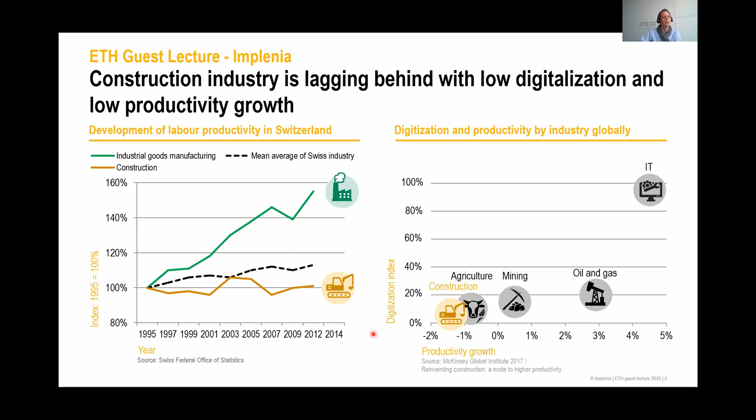So there is definitely a need to change within the construction industry. And I would say if a company like Implenia or other companies do not really use this change that will come, we will have severe issues in the future. So that's a bit why we really have to look at all the newest developments within the construction industry. This is really important for the future of each and every company within the construction industry.

If you Google a bit, you would also see Implenia is building quite intensively abroad. And that's also our mission. So what is the mission of the company Implenia? We want to be the leading multinational integrated construction and real estate company. You see in the claim it's not only integrated construction, but also real estate. So real estate will have a high priority in the future of Implenia, not only buildings.

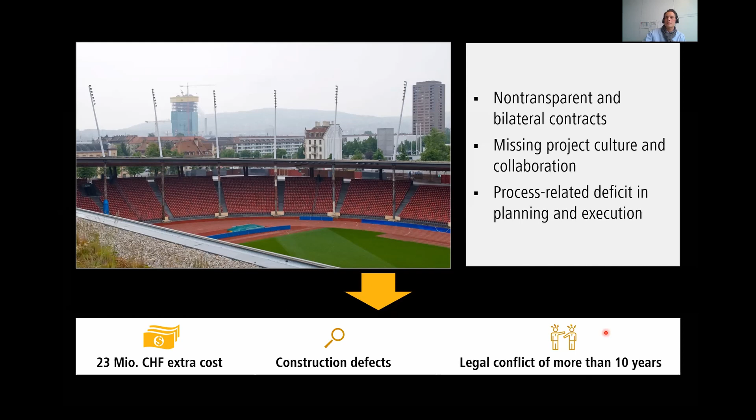So there's a clear sign that cannot be the future. We have to change something.

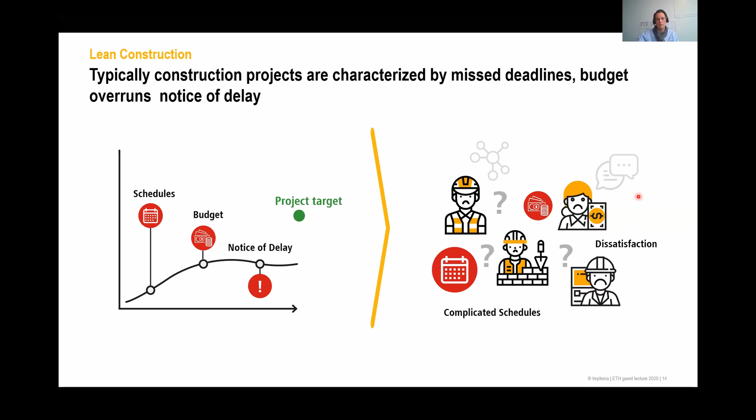Complicated schedules make it difficult to keep track of important to-dos and deadlines. The flood of information within the project often creates confusing communication pathways. This creates a lot of dissatisfaction among all project participants, but unfortunately always also within the client. So at the end, nobody is happy with the situation and nobody wins.

Now, what does lean construction help here? Lean construction puts a central focus on the communication process and on the construction process, which means at the end, what we really try to do is accelerate the construction pace. We try to reduce cost, always with the focus on delivering the right quality that the end customer or client is requesting from us as a company.

The Implenia approach is based on our Implenia values. Like a lot of companies, Implenia has defined their values, which are agility, excellence, integrity, sustainability, and collaboration. We try to embark on the path to efficient and effective projects using lean principles, lean methods, and lean tools. Now again, a bit of the background.

What are our principles? Principles guide our actions, so they are the guidance for us how we should act in terms of lean. Methods are required for the implementation of our principles and must be tailored to a specific project. It's really important that we do not want to use every method on every construction project, but really decide which kind of methods can help a project to be more efficient and effective. We must really define what kind of methods we use for each and every project. Then at the end, the tools just simplify the support of the application of the methods on a construction project within Implenia.

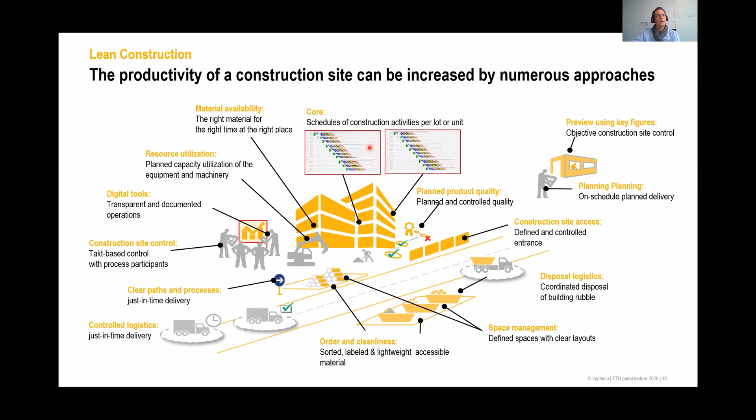The core of the whole topic is always how you tell your subcontractors when they have to do what kind of work in which area. There are a lot of methodologies that help - one is takt planning, the other is last planner system. There are a lot of good tools from the lean area to really improve your core process on a construction site. So there are plenty of possibilities to really improve.

Now, how Implenia has rolled out their lean construction approach. We have defined 5 elements: enablement and awareness of people, methods and tools, standards and lighthouse projects, maturity, and lean organization and network.

In the following slides, I'd like to go into each of the elements and show you an example of how we tried to really implement lean within our group, our company. So for the first topic, enablement, we have clearly created a training concept.

We have 2 main training levels for all our employees - basic level, that's the first level, and the second level is advanced. For each of the levels we also have defined different target groups. We have the external target group, subcontractors and partners - they also get a certain basic training. We have the project team, where we certainly have basic training as well as advanced training.

Always important in the whole lean transformation, it's not only that you have to train your people on the project, but also the management - that's really an important part. That's why we also have training defined for the management role, basic as well as advanced.

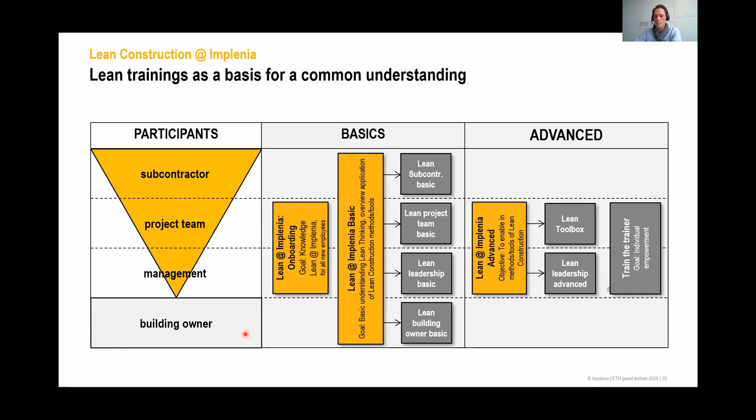And building owner, which means also customer, they need to understand why we implement lean, why we work with lean. At the end they have to understand the topics so they can support, because most of the time it's also important for a construction project that we get feedback, input, and decisions from the owner or our clients, also on an agile base. That's why they need to understand what is behind lean - that's a really important part of the whole story. Do trainings for a common understanding within your company.

Then the second part of the whole lean transformation is standardization of the lean way of working. Therefore, Implenia has set up a lean toolbox. So what is a lean toolbox for us? A lean toolbox at the end gives guidance to the people about standards and examples of how they implement lean or lean methods on the projects.

It always gives some illustrative examples and best practices for the people. So basically at the end, you can see in the toolbox which process step you are at with your project, and you find appropriate tools. All the tools are described within the toolbox with four different areas. Each tool is always described with the target of the tool, a clear description of the method - what you have to do - some linked standards you can use when you try to implement that tool, and you always have some examples.

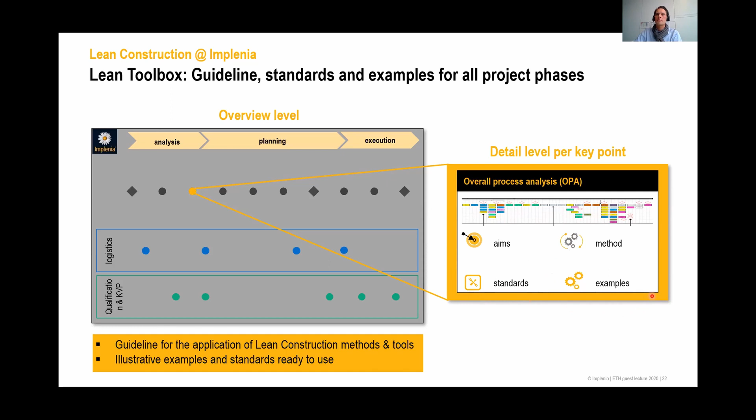How we bring the toolbox to the people - at the end it's a simple SharePoint where all the people within the Implenia group have access and find the relevant information.

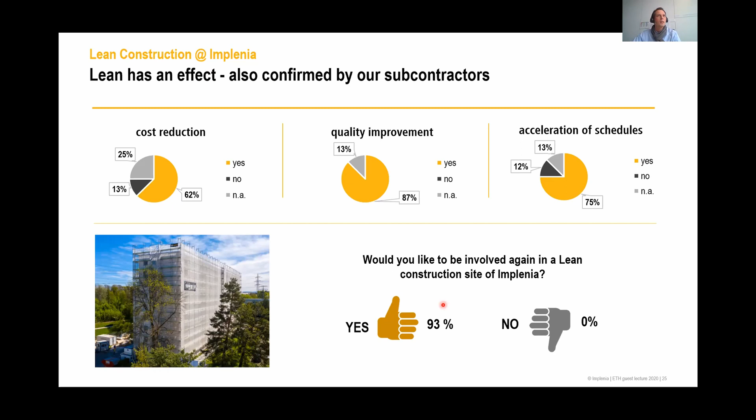So at the end, everybody was happy. And for me, the most important question was, would you like to be involved again in a lean construction site of Implenia? And almost everybody said yes, I like to work for the next project for Implenia again with lean. I think that's really crucial and important for a multiplication of the whole lean topic within the whole Implenia group.

Then the second last part is maturity. In order to continuously improve yourself, you always have to measure and see where you are and where you should go. Therefore, we have two parts within the maturity element. One is we conduct for each and every lean project a so-called project lean maturity assessment, where we assess the project three times: always at the beginning, in the middle, and at the end of the project. We try to see, do we have a maturity level increase within the execution of the project?

Why we do that: on one hand, we try to find some good practices, best practices, that we can share with other projects. On the other hand, to really see if people are developing their lean thinking and lean methodologies within the execution of a project. On the other hand, it's also important to have a look at the whole organization.

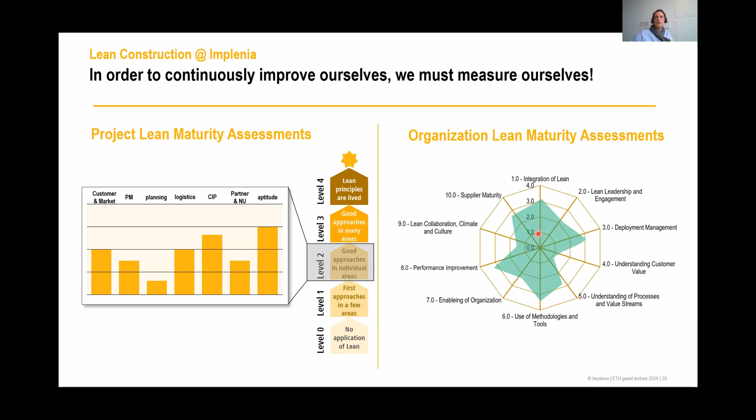So let's say some country organizations, as an example it could be Building Switzerland, where at least twice a year we do an organizational lean maturity assessment, where we see, in 10 different areas, how we rate ourselves. For example, where we have room for improvement, and where we are already in good shape. It's also important to execute the organizational lean assessment not just once, that's not the whole story. You really need to see how you develop over time, and of course you need to increase your maturity in a certain area over time. That's why for us it's really important to measure.

Then the last part is the lean matrix organization, how lean is embedded in the whole local business. First of all, it's important to know that within Implenia we have a support function, global project excellence and services, and within that support function lean is also sitting. We are reporting solid line to the CEO on a global level.

So lean construction belongs to the group support function, global project excellence and services, with a solid line to the CEO. But also at the country level, we have a lot of lean construction specialists, and the local lean specialists are there to implement lean together with the business. On the global level, we try to set the standardization. But at the end, the focus should always be on the operational project staff.

And that's what I've tried to show you with that slide. At the end, we have a lot of operational project staff involved in different projects, in different project phases. And on the other hand, as I said before, we have the lean construction specialists organization.

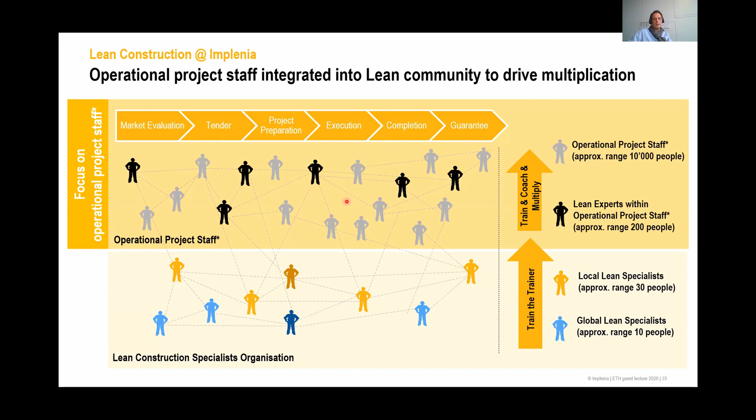So we will not build up lean specialists that at the end do lean for the project people on site. We try to enable our people, our business people, to work according to lean. So that's the clear strategy.

And of course, you always have to measure. We have a clear Power BI dashboard set up to measure all 5 key areas, where we have set up certain initiatives, and what is, for example, the use of the methods on the different projects.

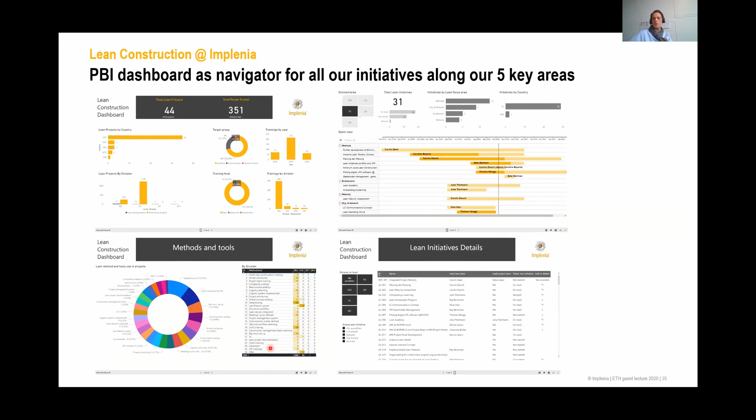But now, also one really important fact is how we use lean on the project at the end. How does it look when we start a project? It's always like that. When we have won a project, there's always the first step: a kickoff meeting between one lean specialist of the local organization together with the project team. They go through the project and analyze the risks. So we start with a new project. What are the risks? What are the learnings from similar projects you have executed?

And how could lean support the project in mastering these risks a bit better or easier? Out of that, we define in a kickoff meeting what kind of methods and tools are useful to implement in that project. So it's not that we do the same for every project. We really try to analyze the project, see the risk, and decide together with the project team what could be helpful for them.

And of course, at the end, we will see some methods and tools for project structuring, overall process analysis. This element will appear in every project. Of course, we have more or less in every project some shop floor management elements. We need to consider contractual elements, so at the end we need to bind our subcontractors to lean. We need to have a clear logistic planning.

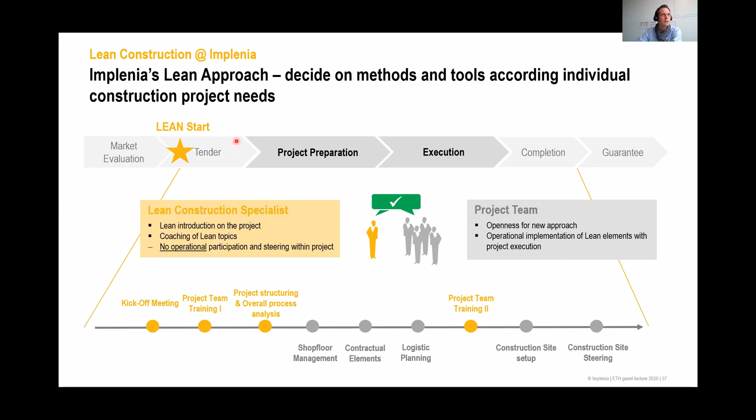Then we again have some project trainings with the people, and then the setup of the construction site, including how you steer the construction site at the end. It's always joint work between the lean construction specialists who introduce lean on the project and coach the lean topics, and the project team that at the end really implements lean in their daily business work. And it's not only within execution—we also try to start already within the tender phase with some lean topics.

Good, so that's basically all. I know I'm a bit over time already, but nevertheless, I would open now for questions and answers.

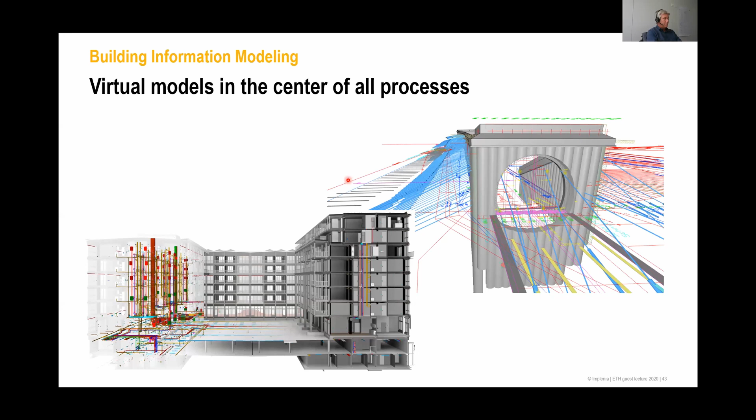At Implenia, we say virtual models are in the center of the processes. The models are really key for a lot of BIM-related topics around the whole processes or life cycle of a project. But it's not only 3D modeling at the end—it's really about getting the information out of these 3D models. I'll come later in more detail to the challenges we have here.

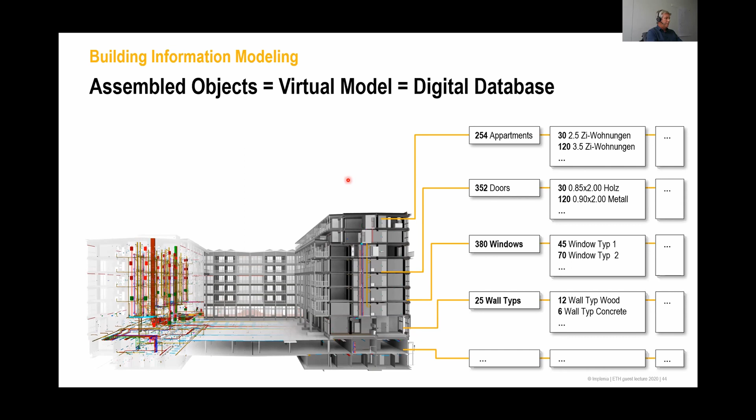The key is often to get the digital data out of the models, so we can do better work preparation, know exactly the scope, know exactly the quantities for the calculation phase, but also for the execution phase later on site. It's very important to get this information out of the models in a more or less automatic way.

In the past, we always had physical resources—we had material, we had people, and we started to produce something, and at the end we got a physical product. But with BIM, we move more into digital design, planning with BIM-related topics, and the digital twin.

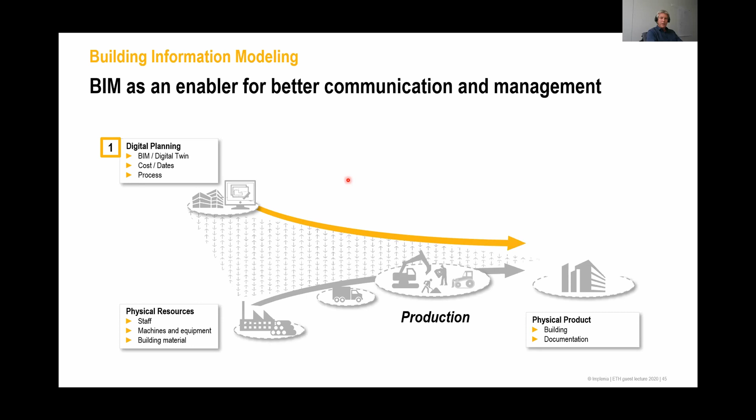You've heard this term very often, I think. Out of this comes the costs and dates, the processes behind how we want to produce, and all this information we use in digital steering, to coordinate the design phase, the planning phase, and to steer and control the status of a project in the design phase but also in the execution phase.

We are also very closely linked to the whole lean team, as you heard before. I sit together with Ray in the same office, so there's a lot of possibility to work together and bring both topics to the people in the company, but also to our customers or suppliers, and so on.

For sure, the final goal is to have an as-built model that we can also use for the facility manager on a long-term basis, to get the benefits of a digital twin over the 50-year life cycle of a project, for example.

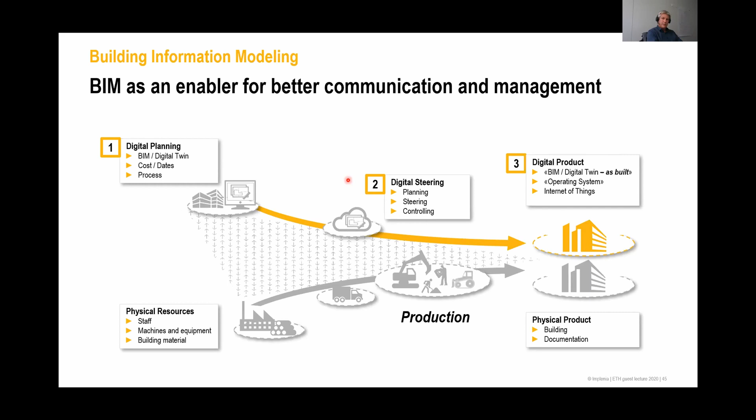We also heard similar things from Ray before—we want to reduce the risk in our projects, be on time, be within costs and budget, and for sure at the end deliver a high quality product with all our doings.

We always focus on the whole life cycle of a project, not only on the 3D model—that's building information modeling. We also do building information management. I heard in German a really nice term for BIM: bewusstes integrales Miteinander, for those of you who understand German. I like the term because it really focuses on collaboration and working together.

We always have to look at the whole life cycle of a project, where we can spend with digital tools, new methods, new ways of planning or executing our projects—where we can create better value based on minimizing risk for schedule, costs, and quality.

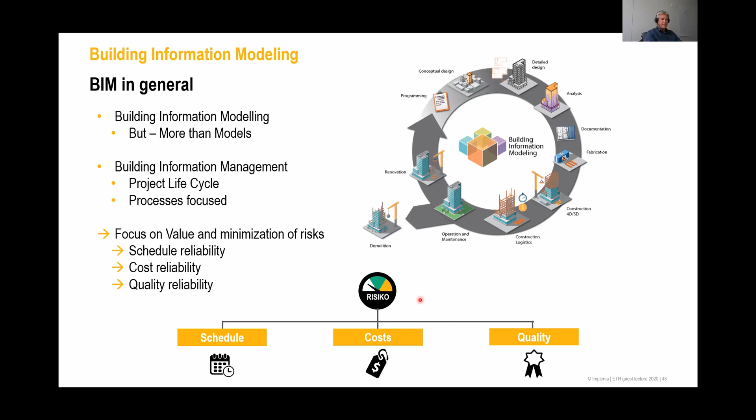There's also a challenge: we have different phases of a construction project, but always different requirements to a model, to the data we need, depending on the offer phase or modeling phase. In an early stage, it's completely different compared to the execution phase, when we want to produce - there we need a production model. So this challenge of having continuity or consistency of data through the whole life cycle of a project is really significant.

It's not really working in some areas, yes, but not in all areas. And we want to build up a common environment where we can bring all these things closer together. So you see here some applications Implenia is also using.

We have, with RIB-iTwo, a kind of data-based management system which we use in the offer phase, in the calculation phase, but also in the work preparation phase, and up to bringing everything to the people on site. That's something Ray also mentioned - we call it a big change project, Inspire.

We want to implement this starting next year at Implenia Switzerland, for the whole first area, the calculation purposes, and then bringing it more and more as a common data environment system to the whole landscape of products or software types in the Implenia organization.

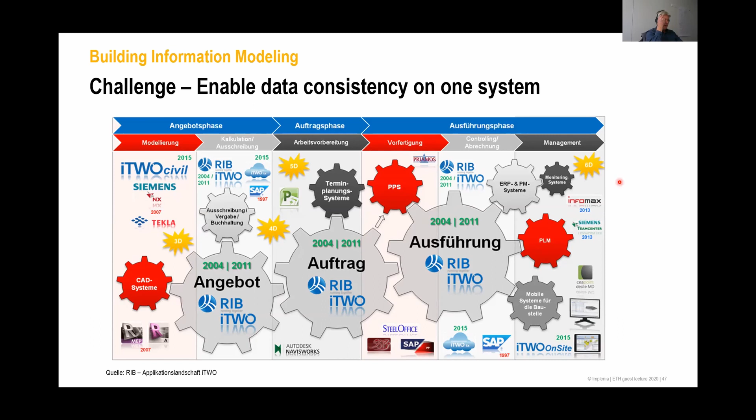Another picture here - I come to the challenge between the different requirements to a model. You see here the different phases of a construction project, where in an early stage we are in a development phase, where we want to find the best solution for our buildings. So we do not exactly know how it will look like.

So we work together with architects to find a solution here. I will come to this later in detail, how this process looks like.

And then when we go more into the calculation purpose, then we need other information related to the model. And when we go more in the direction of execution, then for sure we need production data. Finally, we want to bring everything to the construction site, so people on site can have value out of the data we created before, and really improve the execution phase.

And for sure, at the end, the digital twin for facility management would also be nice to have. It's for sure also a goal for the future to improve this step by step. But first we have to solve all these different kinds of requirements and cover them, hopefully step by step, in a whole system.

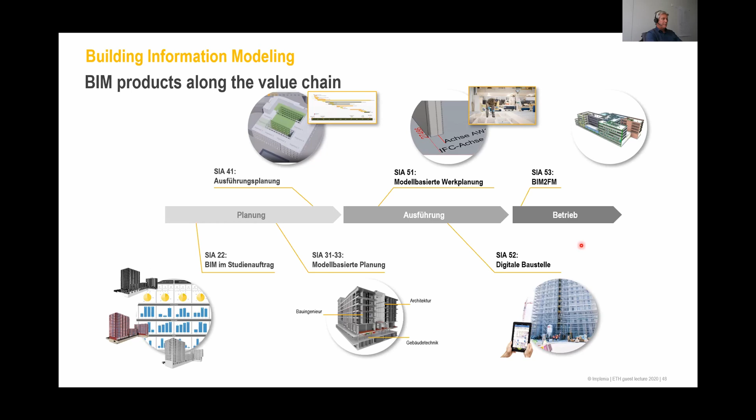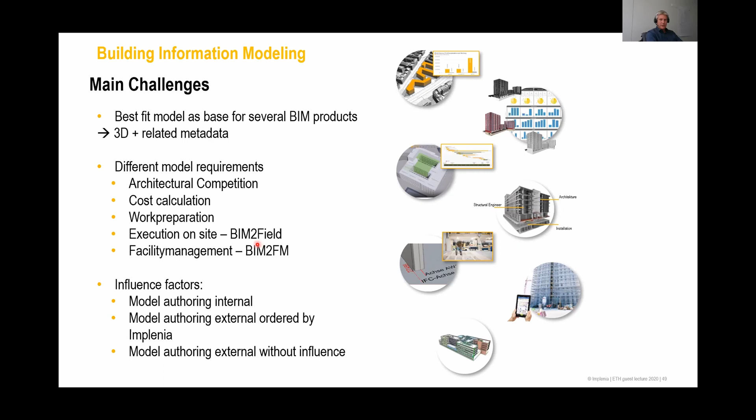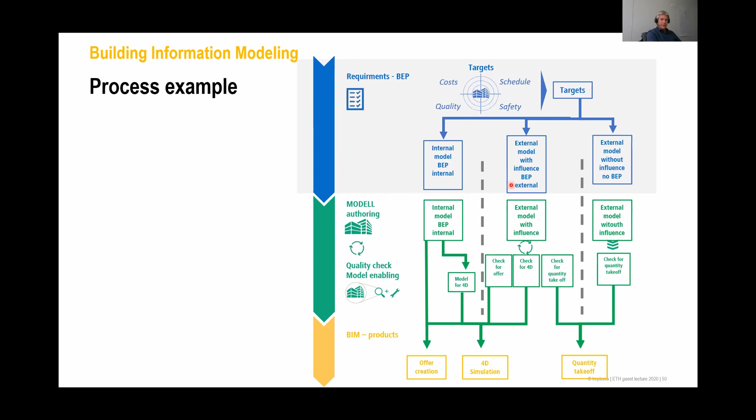I just want to point out that there are several levels of challenges we have to cover in this whole process to really optimize the consistency of data within a project.

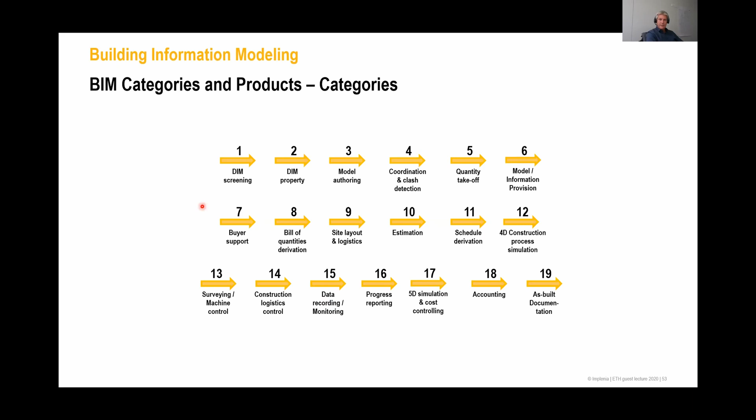At the end of my presentation, I'll show you one actual development in this area. The categories - you don't have to read everything - we categorized into 19 categories, and for each of the 19 categories we have a detailed description of what's behind it, what we understand by it.

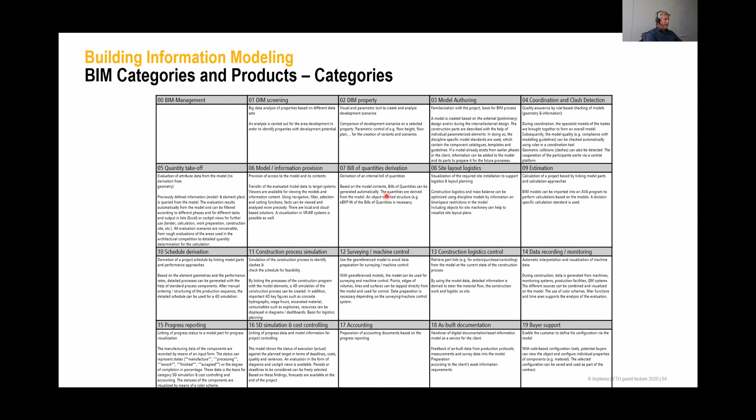For example, for model authoring, this is related to the different divisions at Implenia. This is an example for the division civil engineering, where they describe in more detail what's behind model authoring in this category: what is the description, what are the goals and benefits. That's also very important to think about - what is really our goal, what are the benefits, is there value behind it compared to the effort we have to spend to develop something new?

How many products will we have at the end? It goes over 100, and that's a challenge we have to cover at Implenia - how we can provide all this information about the different possibilities, different use cases, different use of software, and in which project we should use what.

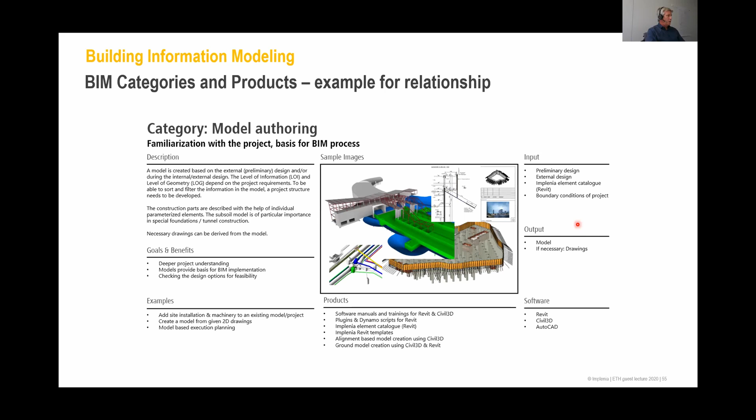Now I come to, I think, 3 examples of how we use it in our projects. I'll first start with BIM in design competition. It's an architectural competition, because Implenia also does real estate projects, so we buy a piece of land and want to develop projects - a building, flats or whatever. And there we really do our own design competition with architects.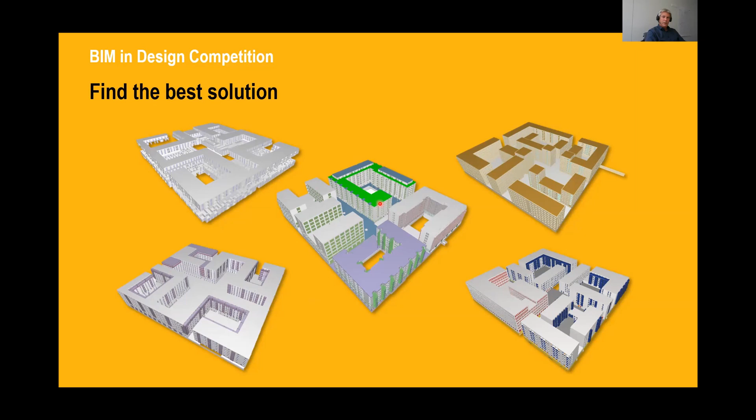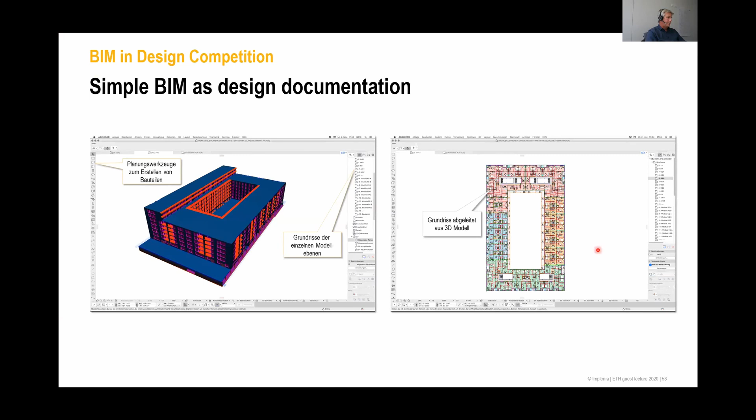In this case, the base is a simple, more generic design as a 3D model with normal CAD software, where we could then automatically get out of this the layout plans from the 3D model. For us in this design competition, it's very important to have the comparison between different solutions. We want an overview of the visualization of the project, but also of the data - the data is key in this, to make the right decision at the end.

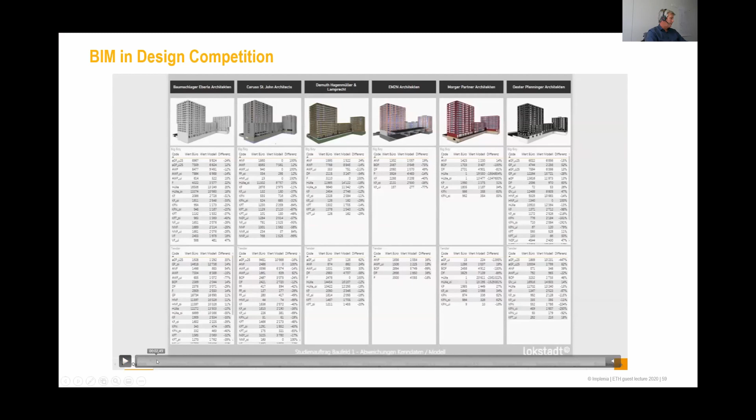Let me see if it's running, because it's not running. There's normally a video behind. I can just see - no, it's not running. I did this test before, but come on, let me see it. Now here, now it's running, and you see that we are always looking for possibilities. You still see my screen, yes?

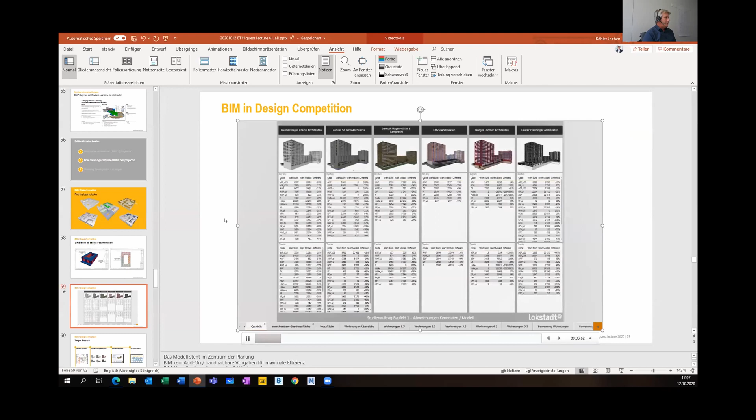Yeah, the possibility is really to show this kind of data in a specific dashboard, so that we have the possibility to make the right decisions based on the data out of a model, directly automated. That's the goal behind it. So what kind of flats, which areas, which size - you can really have a look in this specific dashboard to get a feeling for what is the best solution we should build.

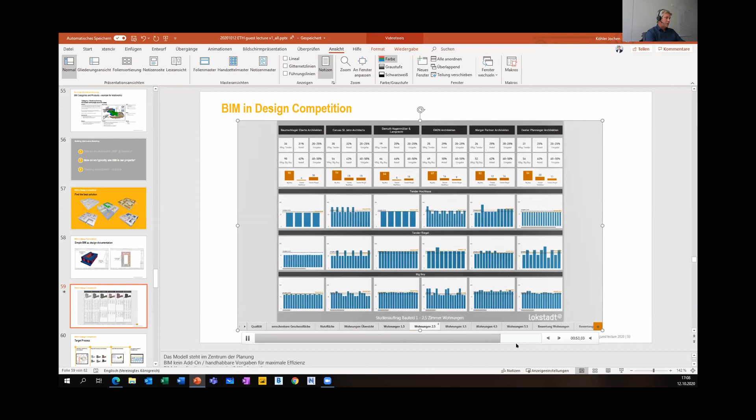So here in the design competition, the target process is really that because it's our own competition, we first clearly define the requirements to the architects, and then they can create out of this a more simple BIM model. The most important point is then to automate the data extraction out of the model, so that at the end the jury can make the best decision for the project we want to build. That's one process we are already using in our projects.

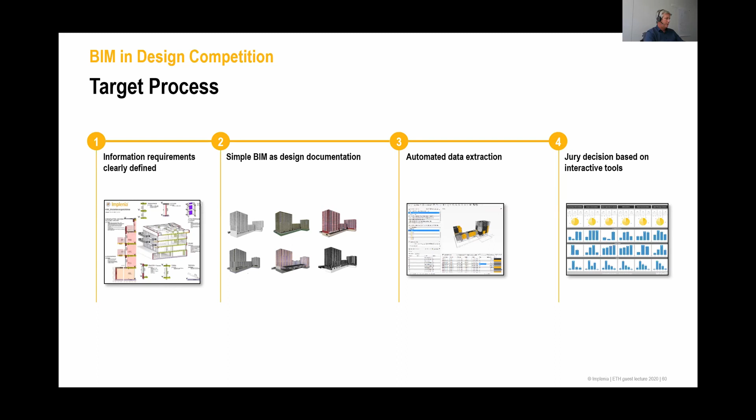At the moment we are starting one or two additional new competitions right now.

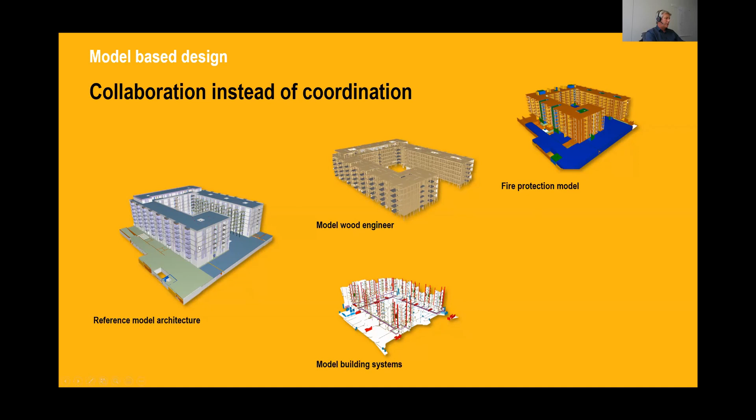The other topic is more about going into the design phase. So when we do model creation for the calculation phase, or later for the execution phase, we also say we should focus more on collaboration instead of coordination. The key is really to bring together all the different areas of a project, like the wood modeler, the fire protection model, the MEP systems, or the architecture model which came out of the competition.

There again, we can clearly define our requirements in a BIM execution plan, for example. But when we really do the design together with the different stakeholders of a project, we have to have these bi-weekly coordination meetings to improve the whole quality of the model during the design phase. That's also something that plays together with a lean approach, really focusing on bringing all people together who are involved in a project to find the best solution we want to build later.

For sure, we are using different kinds of tools for clash detection and issue management, just to clarify directly on the 3D model how a solution should look like and who is responsible for the change until, for example, the next weekly coordination meeting.

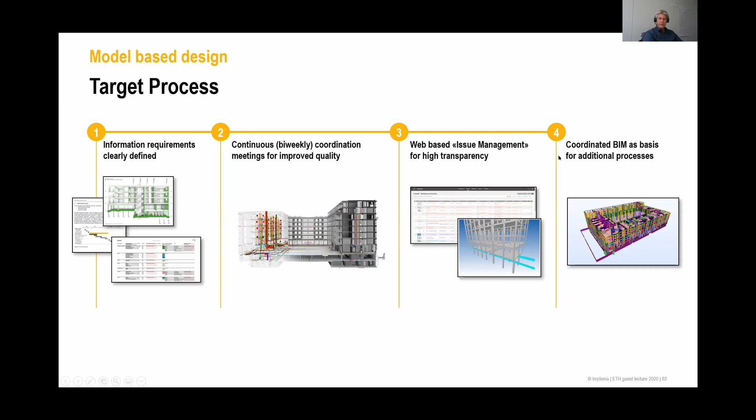And for sure, out of this coordination BIM model, you can use additional processes to extract data again, to visualize everything in a 4D sequence so that we can really show what we want to build.

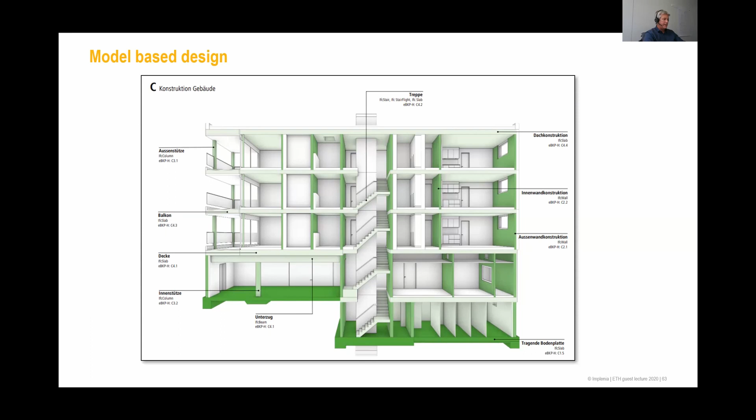Here's an example for the standard: for the BIM execution plan, we have clear naming for everything, how it is classified, also how it's classified in IFC. These kinds of definitions are key for later processes to come, really to get their big value or big benefit out of structured data. So first structuring and describing everything in the BIM execution plan, and then starting with design, is key.

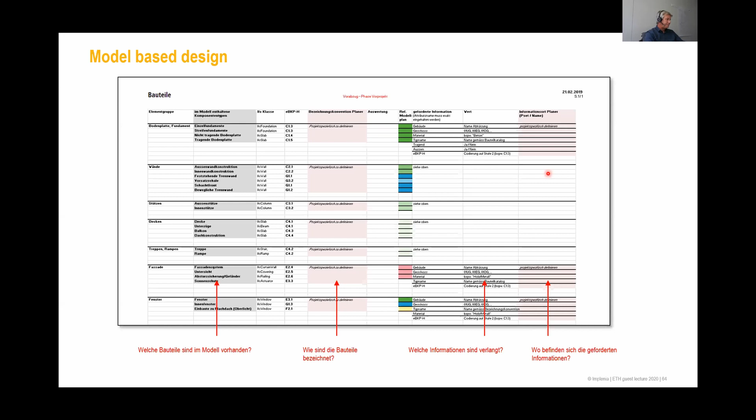And here we can bring out of the model all the information around the parts of the model, the description, what kind of information should be attached to the 3D model, and whether the information is project-related or non-project related or standard information or data attached. That's very, very important.

Then, for example, here's the workflow coordination: we have different parts for the building, or stakeholders - the architect, the structural engineer, HVAC, sprinkler, electrical - and all this comes together in a reference model.

Then with the different specific models, we bring it to a coordination model. And finally, we can reach a complete model - we call it the production model - how we really want to produce it out in the field.

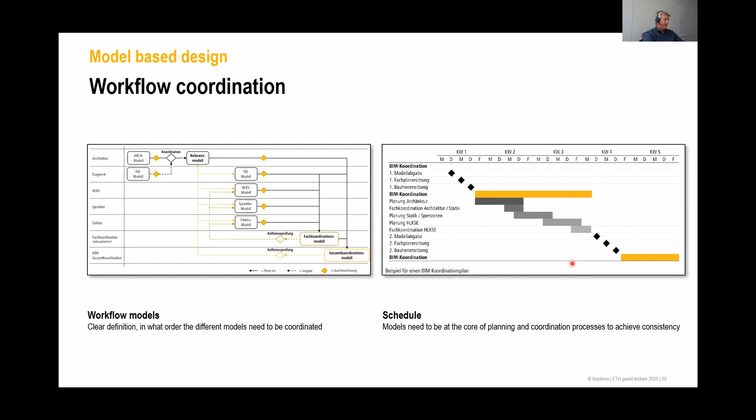And for sure, everything is scheduled additionally, and the models are always the core for the coordination and collaboration here, to have at the end a best-fit model. That's also mentioned in a BIM coordination plan schedule, how we bring everything together per week. This could be several rounds, really, to have at the end the high quality model - depending always on how many collisions or issues we identify during the coordination meetings.

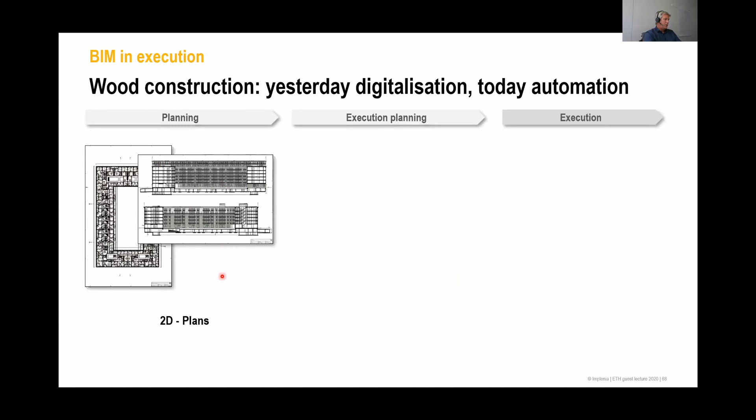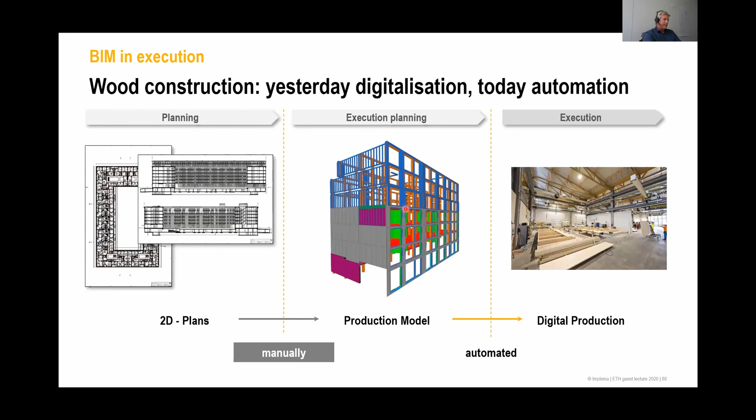Getting ready for the real work - as I mentioned, we want to have in the design phase a kind of production model. One example is the Lokstadt project in Winterthur. In the past, the design process was always based on more or less 2D plans, and in this case, the wood construction project produces out of the 2D plans a kind of 3D production model, using this data for digital production.

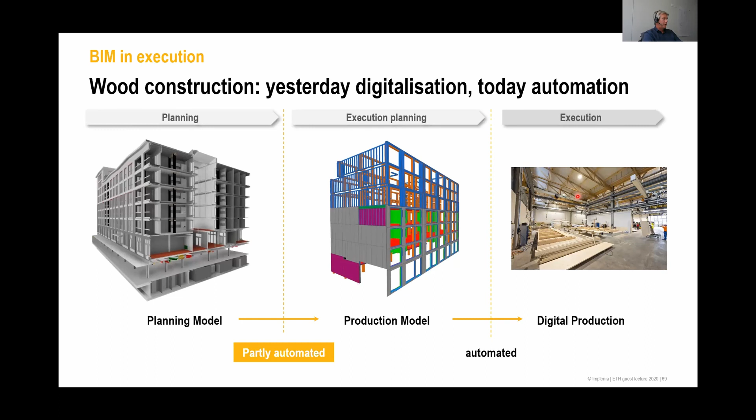In this Lokstadt project, we already had a planning model, a design model, and what we improved here is partly automated, not 100% working so far. We still have to do some things manually, but we always look at how we can improve this process, to bring an architectural model to a production model, to produce our wooden parts and bring them to the construction site. It's important to specify each part, which parameters should be attached, how they should look in detail for documentation purposes.

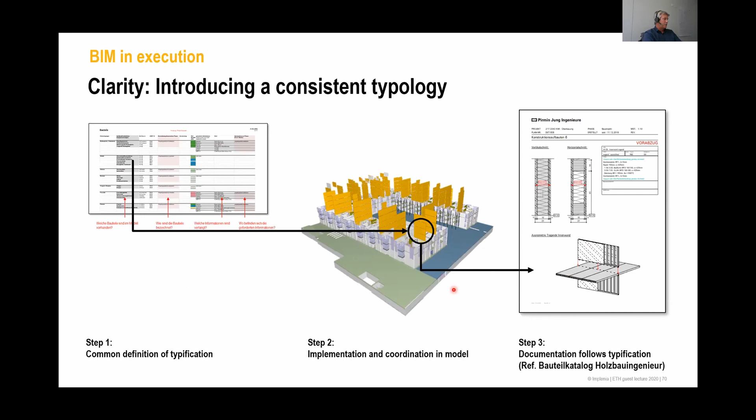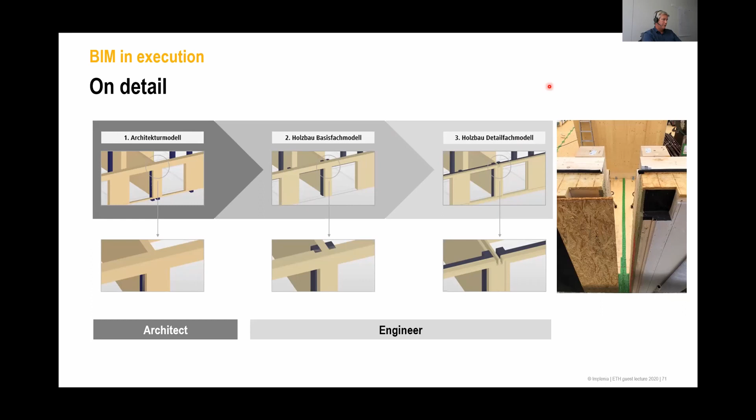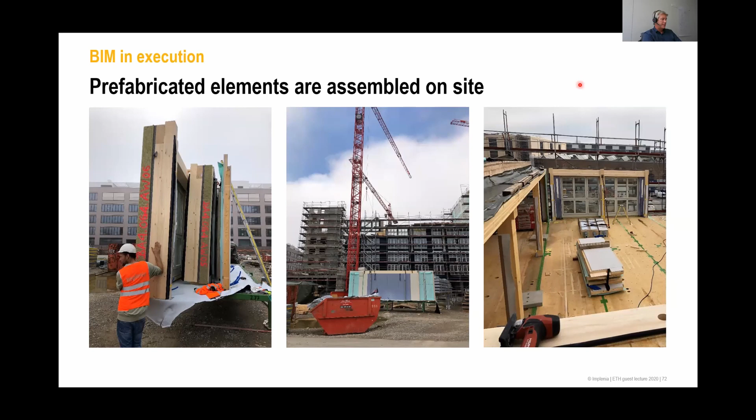So last but not least - before I mentioned the categories and products, I want to show you one example of where we are looking. One category is reality capturing technology, and we started with wanting to do something with drones and photogrammetry, aiming to create a model for progress monitoring or quality. But we soon saw there are different kinds of capturing technologies, like drone vehicles, handheld scanners, or stationary scanners.

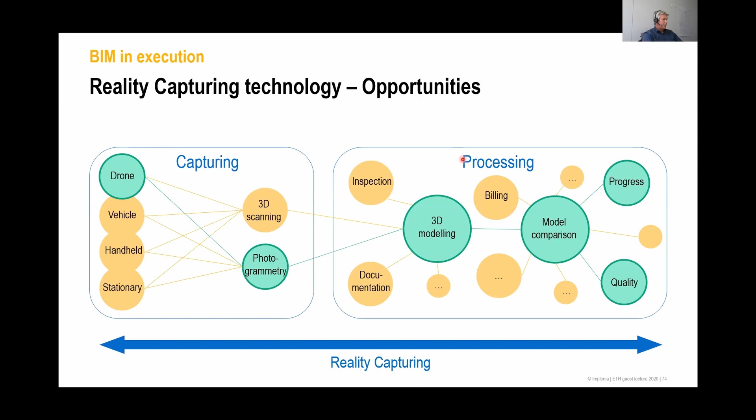If we want to use part of the technology, we always have to look into all these different possibilities. So I hired a young student from the university who started a few months ago, who now collects all the available data and experience at Implenia, because we did a lot of projects in the past where we just tried something. Now we're bringing together all these different initiatives at Implenia to identify the right products in this category, reality capturing, and develop a standardized way of using this technology.

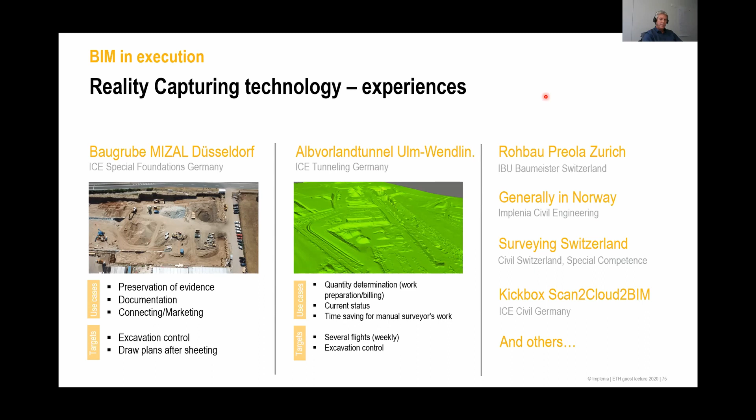That's also exciting for this young student, now employee - we're working closely with smaller startup companies, three of them at the moment, all focused on reality capturing. One, dotscene, I'll show you later - it captures data from existing structures quickly via a handheld scanner. Scaled Robotics and imerso are companies comparing a captured point cloud with pictures or laser scanning, comparing them automatically with the available BIM model to do work progress and quality checks directly through a dashboard.

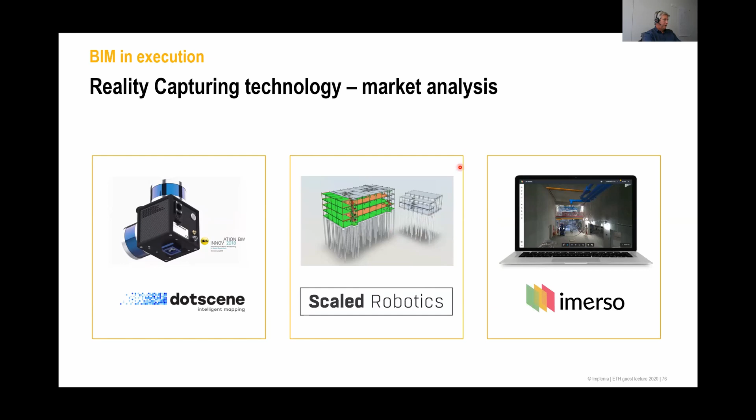That's something we're really improving, and that's the way we first look at what is the possibility to capture data. What can we create out of the captured data, like a point cloud, a mesh, to get volumes for calculation purposes, digital terrain models, really for excavators and earth movement. So again, data out of the point cloud. But then the third level is really how can we use this data for progress management, quality check, or even for billing purposes.

We learned that first we have to cover the capturing topic before we can do the second and third part. So if we want to do a quality check, we first have to cover the other two parts before. So there are different layers of development of this kind of technology.

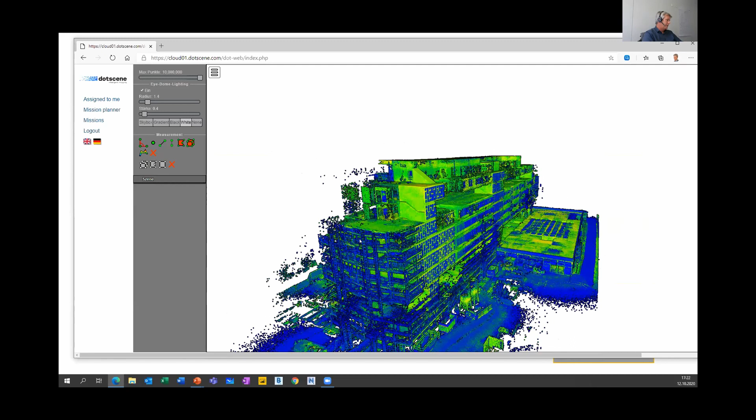Just so you see an impression, I mentioned this dotscene. You see here a small point cloud. It's Felix Platter Spital in Basel. What do you think, how much time does it take to capture this point cloud of this whole building?

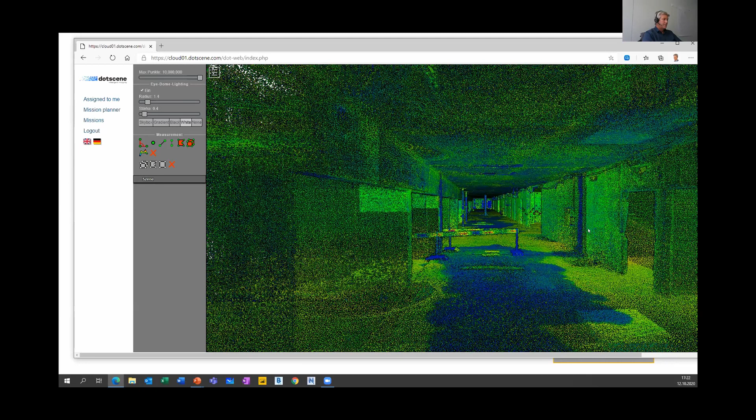Well, I would say it used to take a very long time, but I'm curious to know how fast it happens now. It took us 3 hours. Wow, so for one floor, 25 minutes.

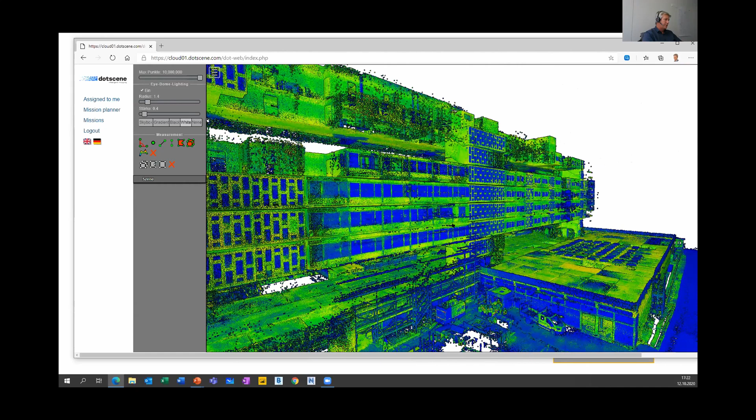And it covered everything from inside, so we only scanned from inside. You see, we just held the scanner out of the windows to capture a little bit of the surrounding. And yes, it was done then, done in 3 hours, and the next day we already had the available point cloud in this cloud-based viewer.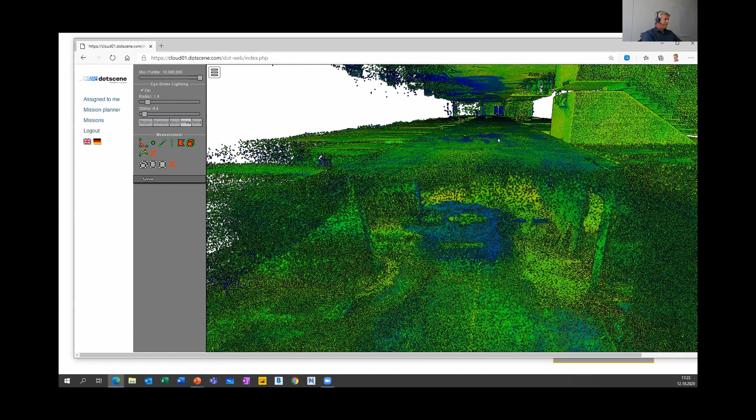And there you can directly start to measure something, ready to say, let me see the height from here to here. So it's about 3.66 meters. So it's a first quick win, really, to have really fast, good data for other purposes like measurement, for calculation purposes for the next step in this building, for example.

Sorry to interrupt, but from my side, it's very exciting to see this. I've watched the research on point cloud image reconstruction for the last 8 to 10 years, I would say. It started from quite a ways back, but now to see it being used in industry is really exciting to see how far it's come. And the fact you can do this in 3 hours is pretty impressive. It's now at the industry ready level.

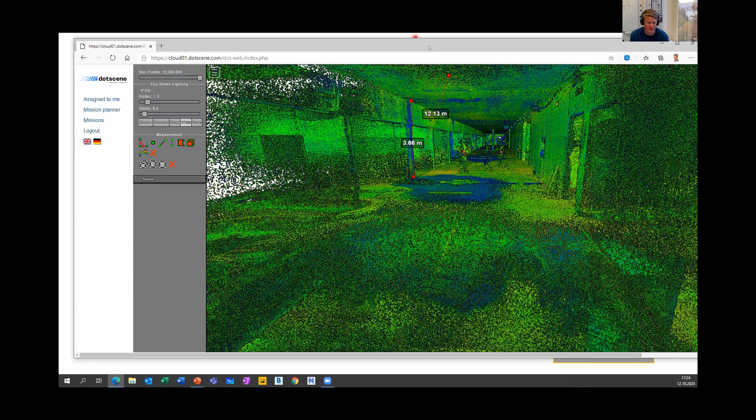Yeah, absolutely. For students, it's a very promising future technology to be aware of. Also, if someone is interested here, we're still looking for some master thesis or something like this in this area.

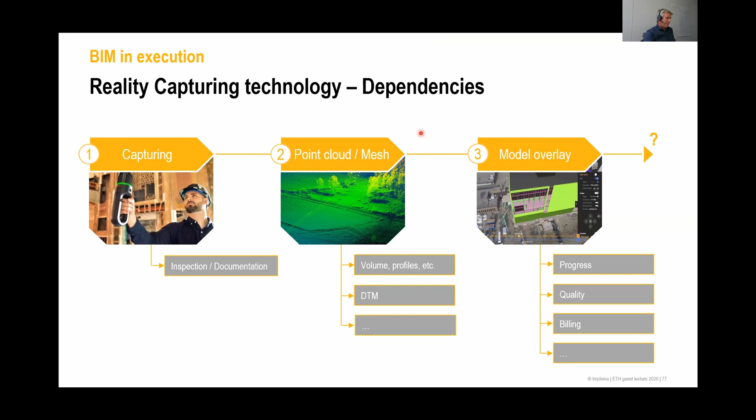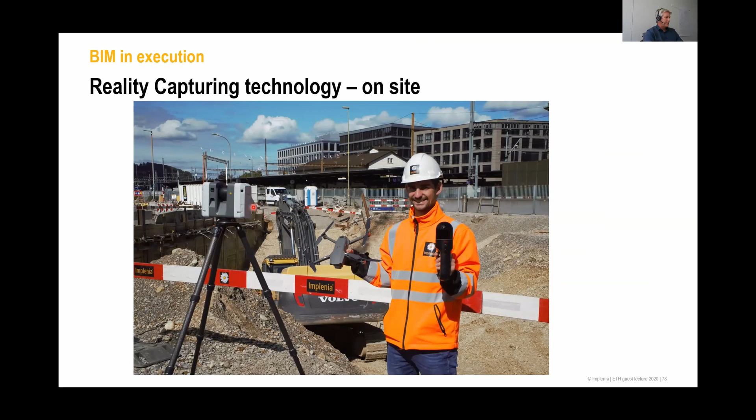Yes, so that's just on site. Here you see this young student I hired, he came from the university in Constance, and that's a really exciting job opportunity at Implenia, really to work with this handheld scanner. There's a Leica handheld scanner, with our drones, also with a stationary scanner, or here in this case, and exactly that's the area we covered with this point cloud here. See, exactly that was the area.

Okay, now I am open for questions and answers.

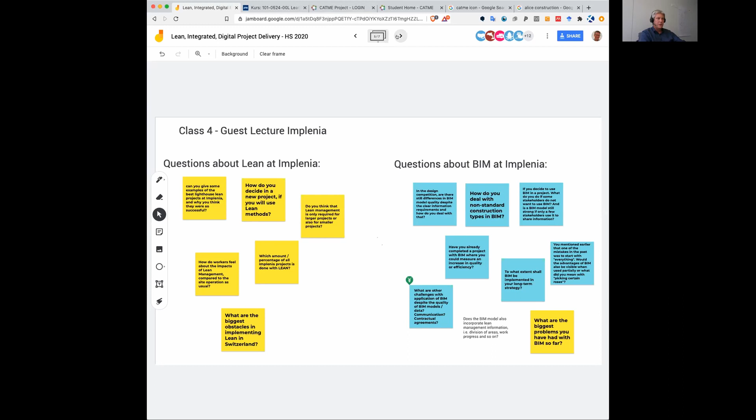To which level do you mean? Do you see BIM being important for Implenia's long-term strategy? Yeah, absolutely - it's one of our key topics in our strategy. Coming back to the picture with the puzzle, in my point of view the puzzle is still growing, and when we talk today about different puzzle pieces and the digitalization of our processes, identifying the right tools to have a continuous process through the whole life cycle - the next level we're talking about is industrialization. I mentioned the prefabrication offsite production, bringing the walls, the floors, whole parts of a building by truck on site, to have the possibility to produce in an industrial way. BIM pays a lot of points into these kinds of processes, and that's also one of our strategy pillars we want to pursue on a long-term basis.